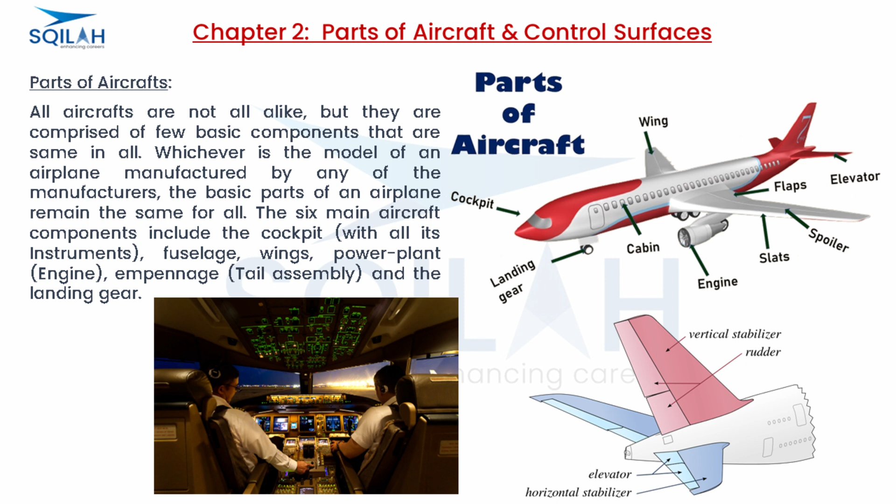The six main aircraft components include the cockpit with all its instruments, the fuselage, wings, power plant or engine, empennage or tail assembly, and the landing gear.

The cockpit of an airplane is also called the flight deck. This is where the pilot controls the aircraft. The cockpit holds the seating area for the flight crew and the command and control section of an airplane.

Modern aircraft cockpits have a number of vital instruments for controlling the airplane on the ground as well as when flying. It also includes vital avionics and radio communication equipment for the pilot to contact ATC.

Electronic flight instruments include a multifunction display, used to control heading, speed, altitude, altimeter, etc.

The primary flight display typically includes attitude indicator, airspeed, heading, and vertical airspeed indicator.

A navigation display provides route information such as waypoints, wind speed, and wind direction. A flight management system includes details about the flight plan. A transponder, which shows the plane's location to air traffic control, is also located in the cockpit.

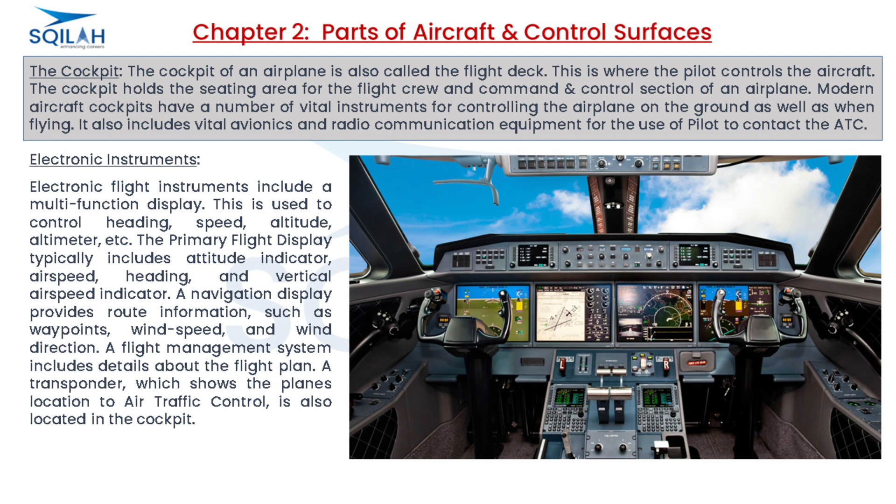The fuselage is the main section, or body, of the airplane which holds the structure together and accommodates passengers, cargo, and the flight crew. The fuselage is the foundation for the structure of the aircraft.

The fuselage of large modern aircraft consists of the passenger cabin and cargo holds, which may accommodate up to 500 passengers and up to 150 tons of cargo.

An aircraft cabin is the section of an aircraft in which passengers travel. In commercial airliners, cabins may be divided into several parts. These can include travel class sections in medium and large aircraft, areas for flight attendants, the galley, and storage for in-flight service. Seats are mostly arranged in rows and aisles.

The higher the travel class, the more space is provided. Cabins of different travel classes are often divided by curtains, sometimes called class dividers.

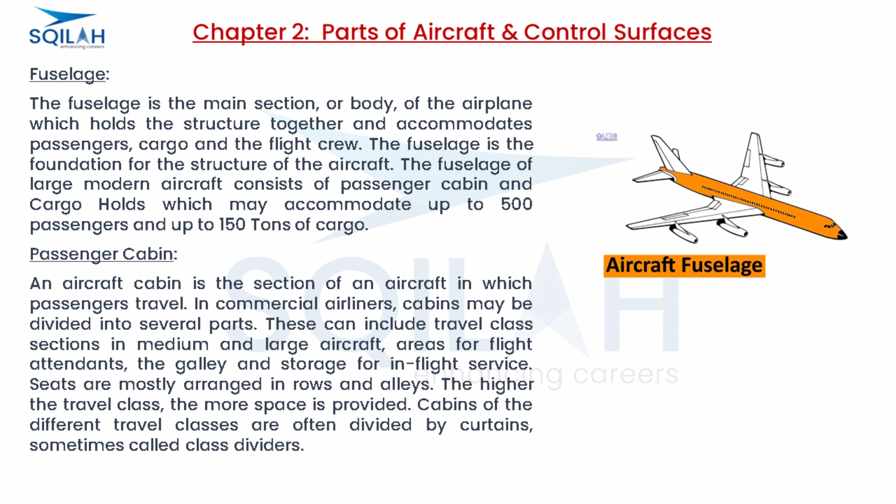Cargo is stored on a plane in the cargo hold. The cargo hold is a large compartment in the belly of the plane specifically designed to store cargo. It is quite similar to the passenger cabin, except that it has no seats, decoration, or pressurization.

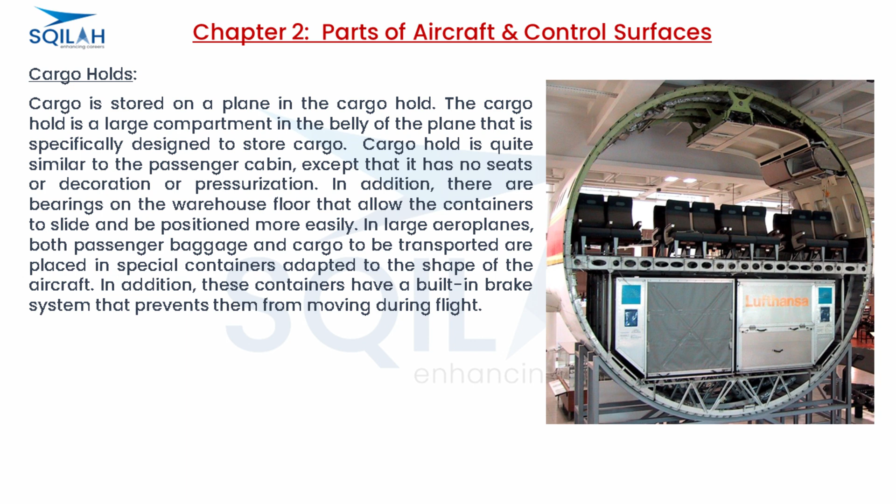There are bearings on the warehouse floor that allow the containers to slide and be positioned more easily. In large airplanes, both passenger baggage and cargo to be transported are placed in special containers adapted to the shape of the aircraft. These containers also have a built-in brake system that prevents them from moving during flight.

The wings of an aircraft serve the same purpose as the wings of a bird. Wings generate lift and control the airflow while flying. A plane is capable of flight because its wings provide lift.

Lift is created by the shape of the wings and the plane's speed as it moves forward. Airplanes are considered fixed-wing aircraft. Wing design is a crucial factor in aviation.

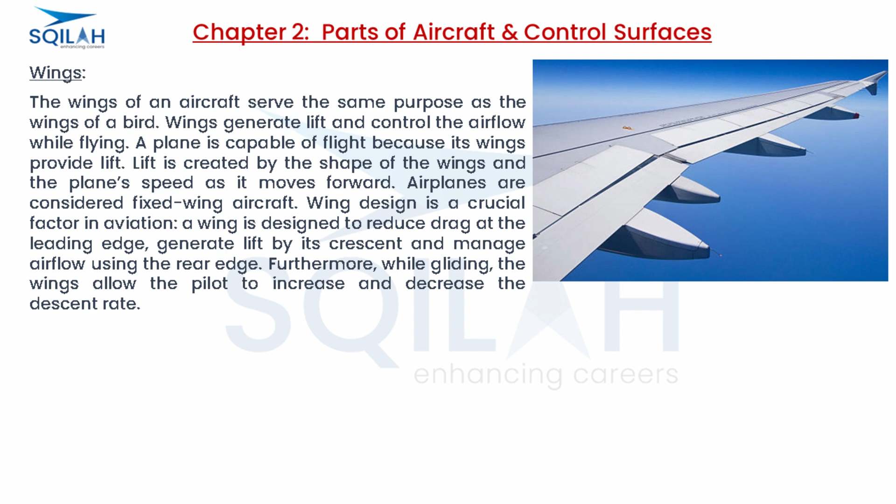A wing is designed to reduce drag at the leading edge, generate lift by its curvature, and manage airflow using the rear edge. Furthermore, while gliding, the wings allow the pilot to increase and decrease the descent rate.

An aircraft engine is the power source for a plane. Engines generate thrust and provide hydraulic and electric power.

Modern aircraft are employed with different types of engines, either piston engines or gas turbines. However, jet engines are preferred by most commercial airliners.

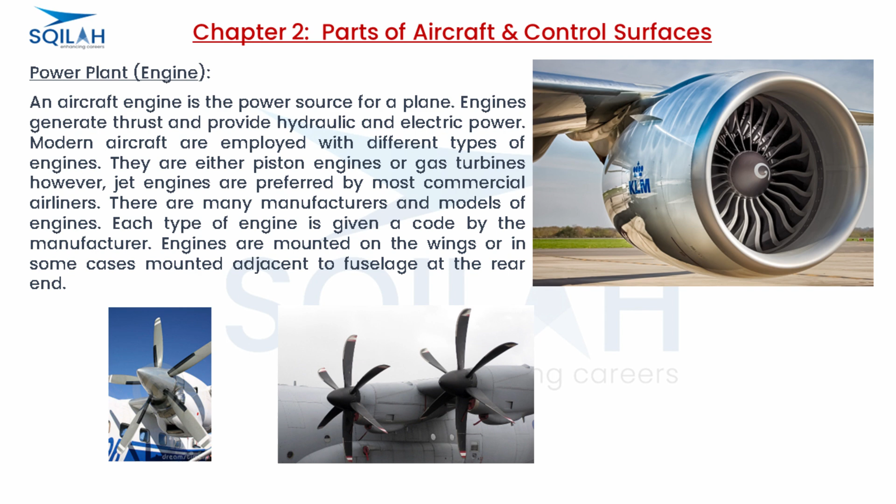There are many manufacturers and models of engines. Each type of engine is given a code by the manufacturer. Engines are mounted on the wings or, in some cases, mounted adjacent to the fuselage at the rear end.

Empennage, tail assembly. The empennage, also called the tail or tail assembly, is located at the rear of an airplane. The tail provides stability during flight, very similar to how feathers on an arrow provide stability. The tail assembly consists of the vertical stabilizer, rudder, elevator, horizontal stabilizer, and static wicks.

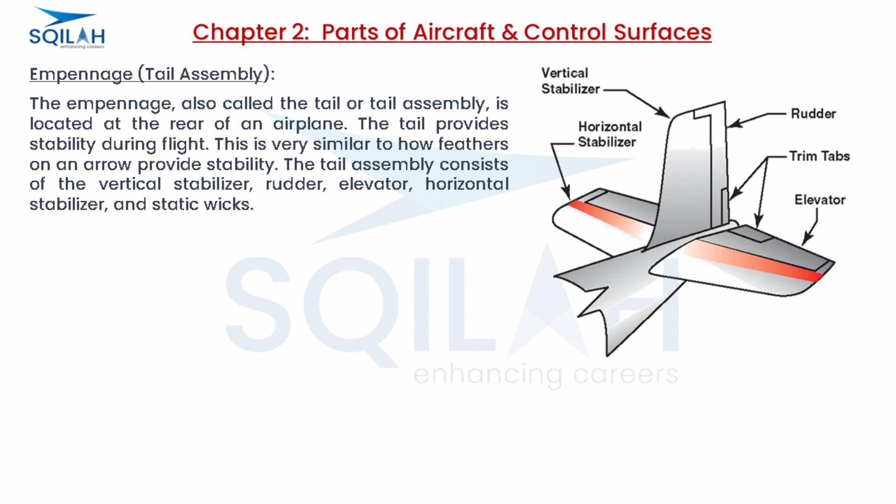Landing gear. The landing gear is also called the undercarriage of an airplane. It is used for both takeoff and landing, and supports the plane when it is on the ground. Landing gear allows the plane to take off, land, and taxi without damage, and is equipped with a hydraulic system to take on a huge load at the time of landing.

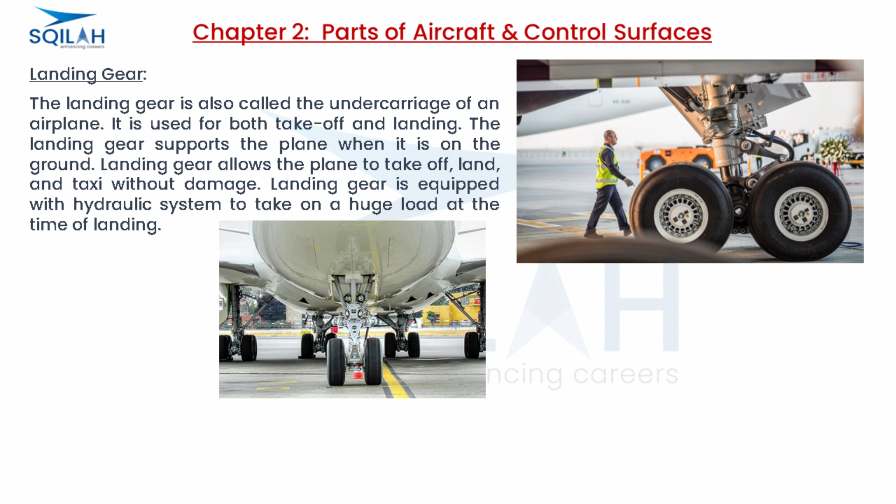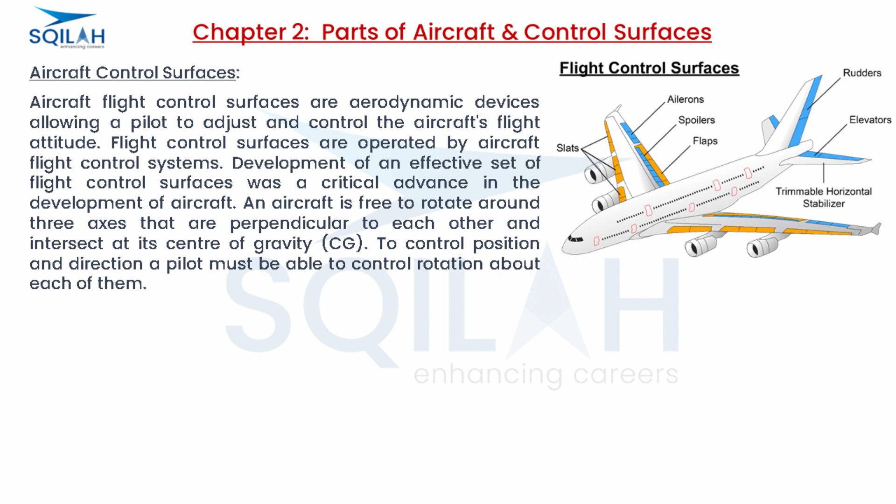Aircraft control surfaces. Aircraft flight control surfaces are aerodynamic devices allowing a pilot to adjust and control the aircraft's flight attitude. Flight control surfaces are operated by aircraft flight control systems. Development of an effective set of flight control surfaces was a critical advance in the development of aircraft. An aircraft is free to rotate around three axes that are perpendicular to each other and intersect at its center of gravity, CG. To control position and direction, a pilot must be able to control rotation about each of them.

Main control surfaces. The main control surfaces of a fixed-wing aircraft are attached to the airframe on hinges or tracks so they may move and thus deflect the airstream passing over them. This redirection of the airstream generates an unbalanced force to rotate the plane about the associated axis.

Aileron surface. Ailerons increase or decrease lift asymmetrically in order to change roll and thus move the aircraft left or right while flying. Ailerons are mounted on the trailing edge of each wing near the wingtips and move in opposite directions. The ailerons primarily control roll.

Elevator. Elevators increase or decrease lift on the horizontal stabilizer symmetrically in order to control the pitch motion of an airplane. Elevators are hinged surfaces fitted at the rear of the horizontal stabilizer. The elevators move up and down.

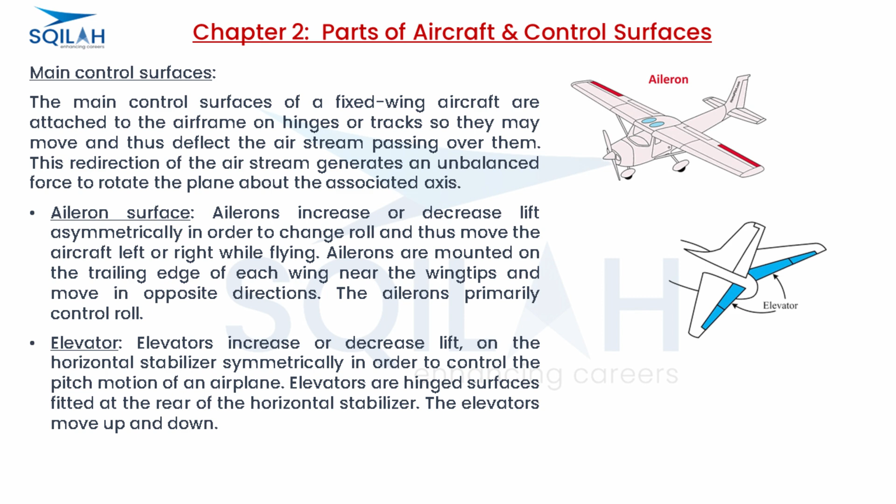Rudder. The rudder is typically mounted on the trailing edge of the vertical stabilizer, part of the empennage. The rudder is a fundamental control surface which is typically controlled by pedals rather than at the stick. It is the primary means of controlling yaw, the rotation of an airplane about its vertical axis. The rudder is used to turn the aircraft left or right on the ground. In the air, however, the rudder is primarily used to coordinate left and right turns.

Horizontal stabilizer. The horizontal stabilizer helps maintain an airplane's equilibrium and stability in flight. It does so by providing a mini-wing at a certain distance from the main wings. This smaller wing produces enough lift to control the pitch of the aircraft and maintain its stability.

Vertical stabilizer. The vertical stabilizer prevents lateral movements of the airplane. Without a vertical stabilizer, most aircraft would lose lateral control, tend to slip, increase drag, and become uncontrollable.

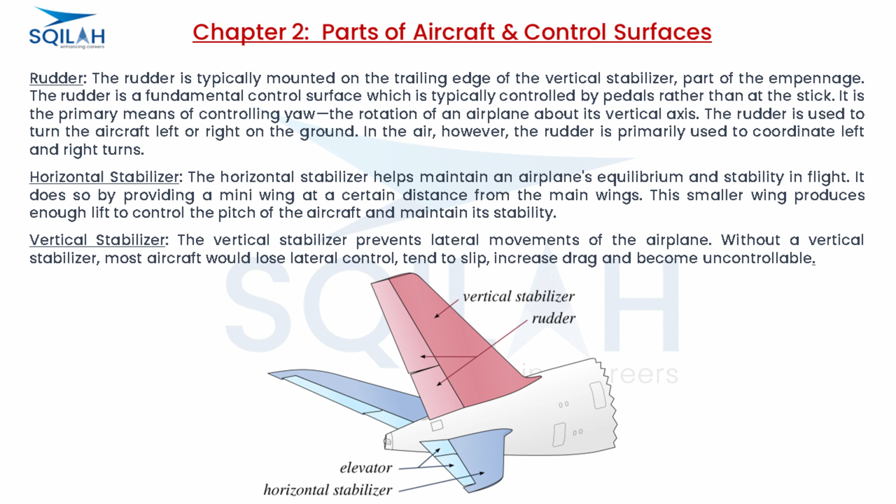Spoilers. Spoilers are small, hinged plates on the top portion of wings. Spoilers can be used to slow an aircraft or to make an aircraft descend if they are deployed on both wings.

Flaps. Flaps are mounted on the trailing edge on the inboard section of each wing. They are deflected down to increase the effective curvature of the wing. Flaps raise the maximum lift coefficient of the aircraft and therefore reduce its stalling speed.

Slats. Slats, also known as leading edge devices, are extensions to the front of a wing for lift augmentation and are intended to reduce the stalling speed by altering the airflow over the wing.

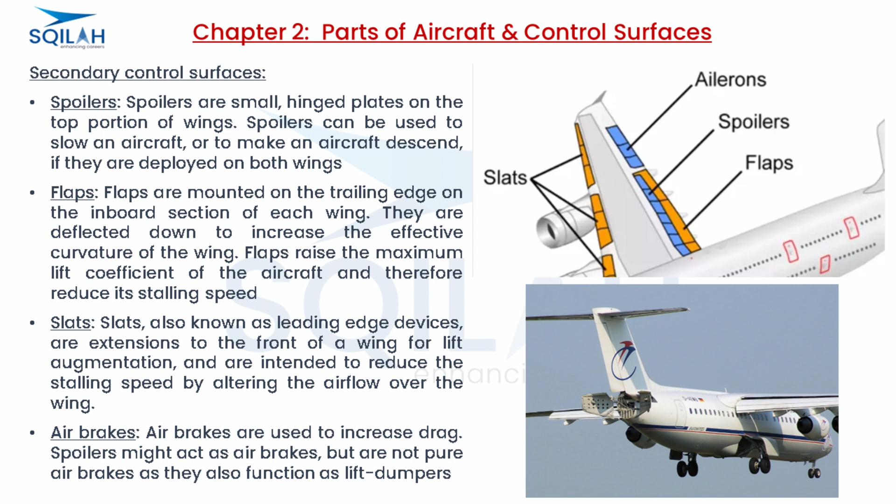Air brakes. Air brakes are used to increase drag. Spoilers might act as air brakes, but are not pure air brakes as they also function as lift dumpers.